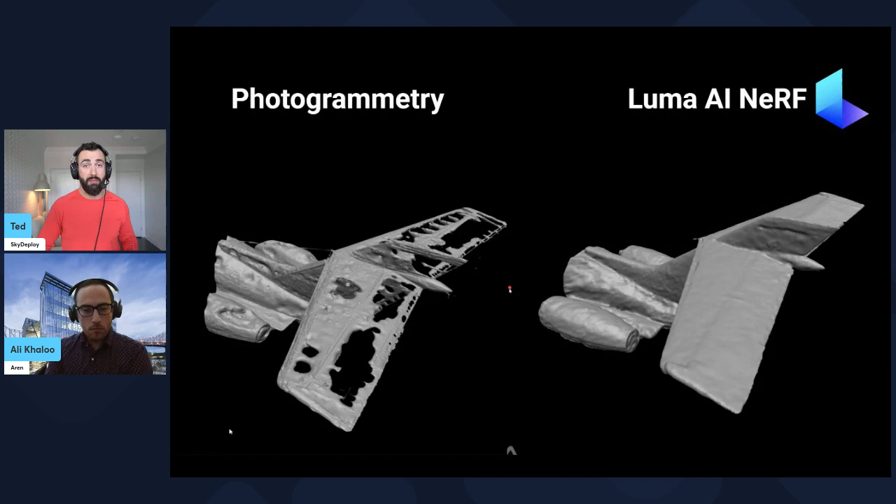But you can see right away that the holes, the Swiss cheese on that tail section, has been patched up, and it looks pretty geometrically correct, right? So this is a huge advancement. We have a lot of problems in reconstructing shiny or very flat materials in terms of their surface texture. So I think this is really important, especially in the field of inspections for civil engineering, because we're running across metal surfaces all the time. That's 3D reconstruction. So we have some work to do there, but we're on our way.

With data collection, that's one of the biggest factors in really moving this forward, I think, because you have to really understand there's two different methods of collecting data: fully manual, but then there's automatic, of course, which is what we've had up until now. But automatic is still difficult. You can automate, but it's still dependent on many factors. It takes a lot of planning, a lot of skill in the field and before to do that planning and make sure that everything is safe. In a lot of cases, you're dependent on other factors like GPS, which is completely out of your control.

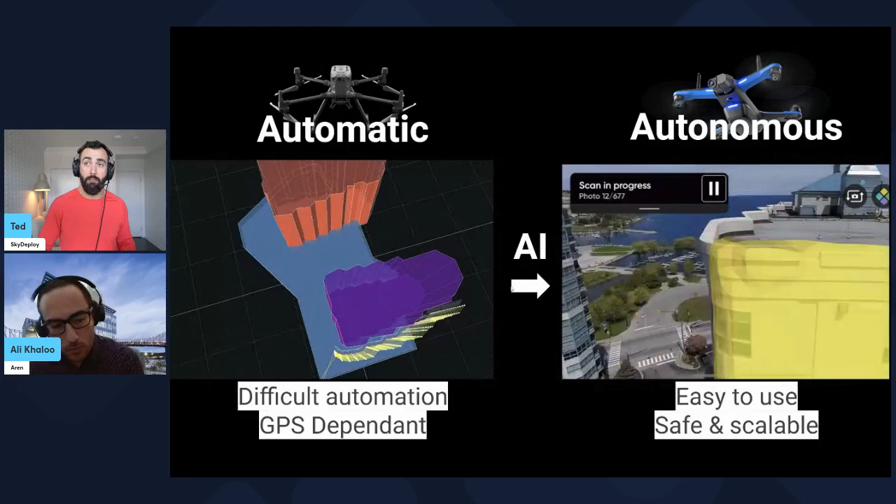And I'm personally seeing a huge move forward in this field and making this more scalable, easy to use, using drones in areas where you would never have put a drone before, like under a bridge. And this has me really excited because this means it's scalable. And as a business owner, I always think about scale. I always think about how are we going to be able to grow and do everything everywhere all at once. Movie reference there.

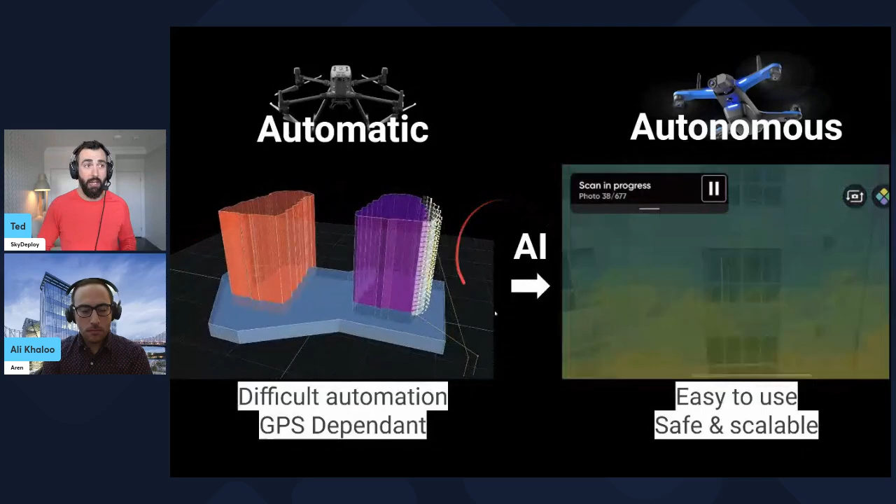And this is my favorite component of the data collection part, the AI in the flying of the aircraft. Specifically, the example you're seeing here is the Skydio 2 Plus with 3D Scan that I used for this facade inspection, and I planned it with an automatic drone in mind first. Then I tried 3D Scan when I got there, and it just worked, and it was so easy, and I could hand it to any one of my employees, and then they're off and running.

And then finally, data analysis. That's what we're going to be talking about in depth today. And data analysis, I mean, this has been around forever. We're always analyzing some sort of data. But in the civil engineering world, it gets pretty complex. And even with drones, that complexity remains, right?

So Ali, you shared with me the slides on the left. Can you walk me through what we're looking at? Absolutely. So before jumping all in on AI and analyzing visual data, let's take a step back and understand what is the status quo. And as I mentioned before, I've done it myself, so I have first-hand experience on this one.

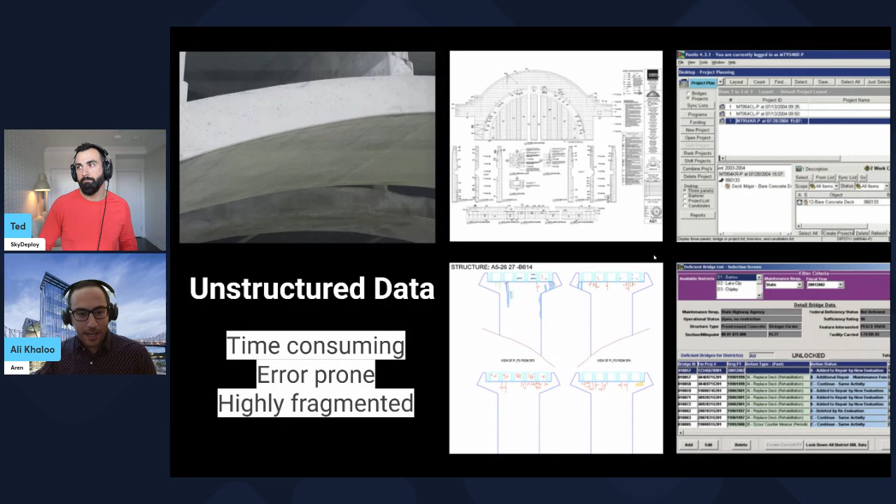So when you're looking at the way that you're creating data from our assets, the whole condition assessment inspection, which later on you're going to use for decision making, that whole pipeline is very much precarious and outdated. And when you're looking at the details of it, it really didn't change much since the 70s. So what happens right now is you have very skilled engineers that you have to send out there, and they have to literally climb and walk miles and miles of infrastructure, let's say bridges, and with nothing better than their naked eyes, they have to look for millimetric damages, such as cracks.

Sometimes it's literally naked eyes. Sometimes it's hammer sounding that they have to do to find the hollow area. Sometimes they have to use binoculars to look for different things. And after doing all of that, which by its nature is going to be inconsistent and subjective, you have a newbie going out or a very experienced inspector, you're going to get different results. And that's known within the industry. After that, you're coming back to your office and you have to put together a report.

So in the middle, what you're seeing are actual reports from a building facade on the top and from a bridge on the bottom. In these cases, you have to go through your field notes, go through the images, which like the ones you're seeing here, by nature are decontextualized. So you don't know exactly where you took those images unless you're making clear notes. And now you have to put together those reports. In a good number of cases, you have to go in AutoCAD and start drawing that facade, that element of the bridge, and draw the damages, like the one you're seeing in the middle on the bottom. Those red lines are cracks drawn by an engineer manually on that asset. So it's a very tedious task.

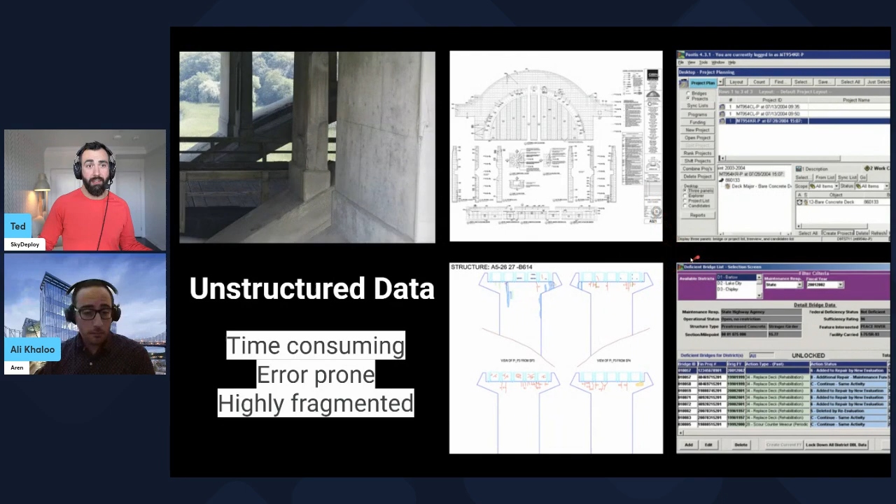Absolutely. So you're in the thick of it. You were the one doing some of this work and making these spreadsheets and these drawings. And I guess that's where the inception, the idea for AREN came from, right? And that's the problem you wanted to solve. So that's what AREN is about.

It's about ingesting various types of data and then using AI, computer vision, a whole mixture of technologies to really streamline that final process and then essentially make better decisions, because everything is in one place, but it's also been really boiled down to what matters and efficient. Absolutely. So you have to keep in mind that we are capturing a lot of data from these assets and different sources.

Sometimes it's something as simple as photos from a point and shoot camera or your cell phone. Maybe you get more sophisticated and you add a drone to the whole data collection. Maybe you have lidar. Maybe you have a 360-degree camera. Maybe you have infrared. So what our product does is it takes that data from our clients, runs its magic, and then as an output, what you get is a highly detailed visualization of the asset and its health through time, as well as preventive maintenance plans and capital allocation plans.

But when we're talking about the 3D models and the way that we are doing this change in time analysis, it's based on the information that you're seeing on the right hand side. So basically, we are creating 3D models, so all the analysis happens in 3D. We are detecting all the damages, quantifying those damages, providing the severity analysis of them, and all of it is based on the codes that we have in each country. Let's say in the US, for bridges, you do that based on the AASHTO element level bridge inspection manual. So everything is according to the standards, and it's basically part of the workflow of how we do the inspections, but now it's augmented through technology and through AI in particular.

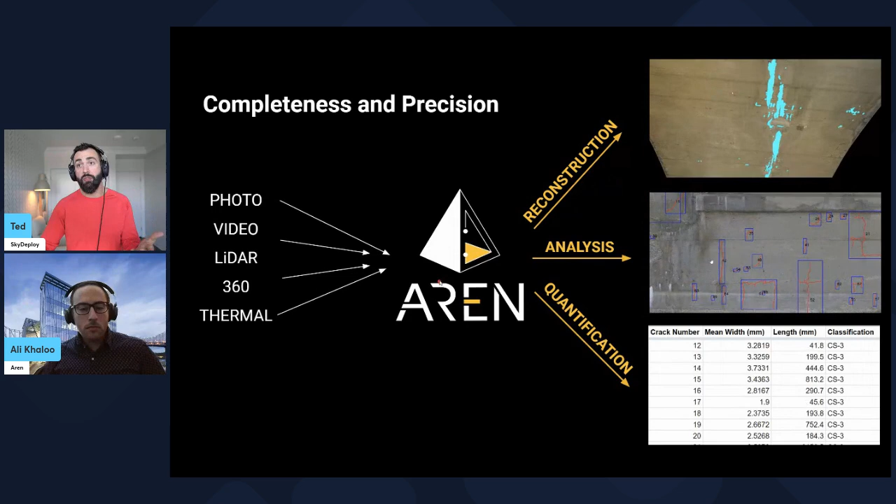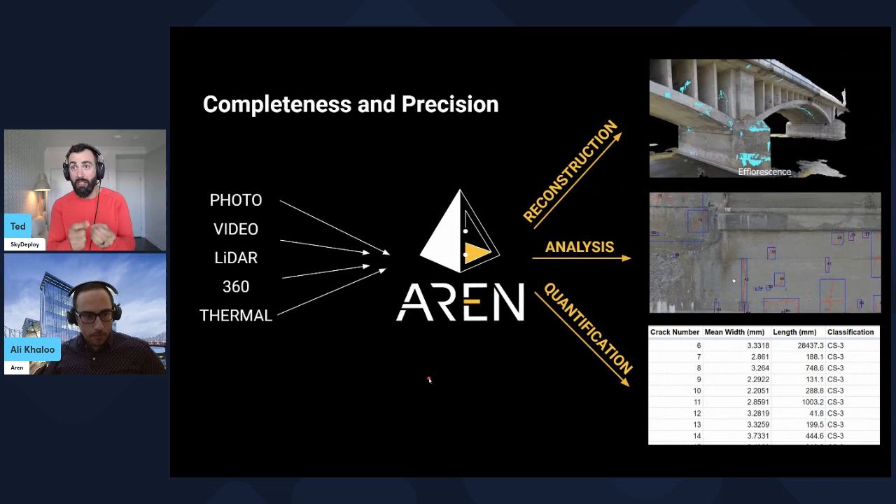But when those things come together, and as they are getting easier and more scalable to put together, then you get the 3D reconstruction, the 3D model from photogrammetry, built into your product. You don't have to do that elsewhere and bring it in. You get the analysis through the AI, so that saves an insane amount of time in terms of going through and looking for it. Right, that's 90% of the work, and then an engineer can validate it afterwards. And my favorite part is the quantifiable data on a damage by damage, element by element level, and that's something that before I saw AREN, I hadn't seen done completely in an automated fashion. And that got me really excited.

So, short answer, absolutely yes. And you have to keep in mind the whole goal of asset management. Let's say you're an owner and you're going to have that asset for the next 50 or 100 years. These assets usually outlive us. What you want is to minimize the life cycle cost and at the same time improve the serviceability of that asset. Those are the top two things that you want to do. And in order to do that, as we mentioned a little bit earlier, you need to have good data. You need to have robust data and assessment.

So what's happening here is, as you do these kind of assessments over time, which by law you have to do at a certain frequency, you have to go back to your asset and do it. Now, because you have this detailed information, we are able to do this assessment over and over time and do this change analysis.

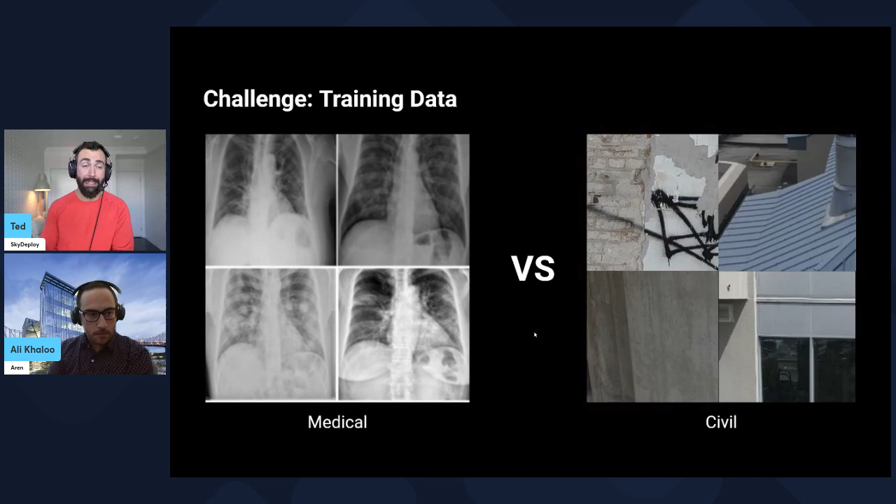And like you said, the data isn't collected with the intention of making it into 3D geospatial formats after, right? So no photogrammetry intended with the data collection, even if the data set exists. So that's a big problem. Now, let's say you have a data set, you've trained it. What kind of scene understanding is there, and what do you need to apply in the case of engineering and civil assets? That's a very important thing. It's not just, hey, let's apply AI. Let's apply AI to this very particular problem.

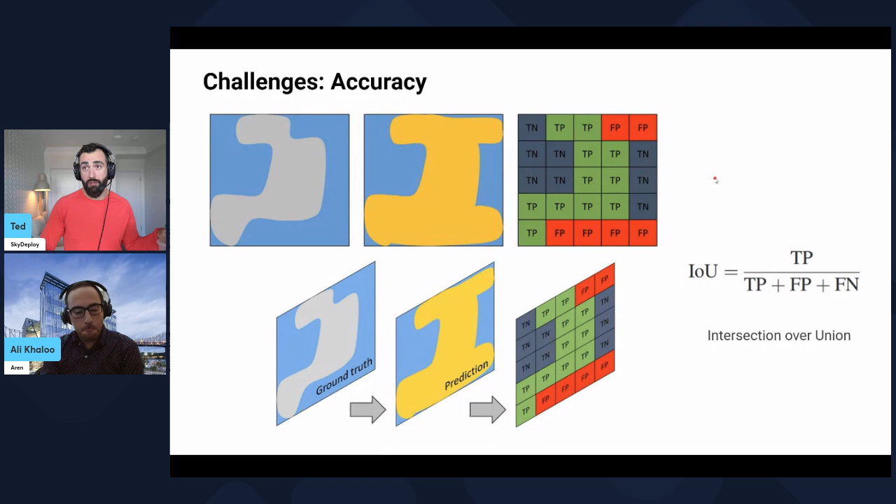And it's a real reputation burner if you get it wrong, right? Yep. You've got to be ready for game time when you're going out and doing this type of inspection, and it's something that the engineers are looking at. So there's no chance for mistakes. You really have to prepare and be ready and have great accuracy out of your models.

So another little factor of difficulty, just really quickly: the way I understand this slide is the crack in this image takes up such a small percentage of the pixels, right? It's just such a minute detail. To us humans it's obvious, but to a computer that only sees numbers and pixels, that can really throw it off as well, right? Is that what we're looking at here?

Absolutely. So you're talking about challenges on why this is a tough cookie, a tough task. So basically what happens here is the computer is going to learn from the different features that it's going to see in your data. So you have the target region, let's say in this case cracks, that yellow, as a good example.

So when you have the pixels associated with the crack, or defined as cracks, and the ratio is 1 over 1,000, so one for the crack pixel and 1,000 for everything else, we call that an imbalanced data set, and your mathematical model, your deep learning neural network, whatever you want to call it, should account for that, because you're not seeing so many of the crack pixels. You're actually seeing a lot of background.

So what's going to happen if you don't account for that? Going back to the previous slide, which is the accuracy, if you don't account for this kind of imbalanced nature of your data set, what you're going to have is what you're seeing on the lower half of the slide: false positives and false negatives. Especially the false positives, there's going to be a lot of that.

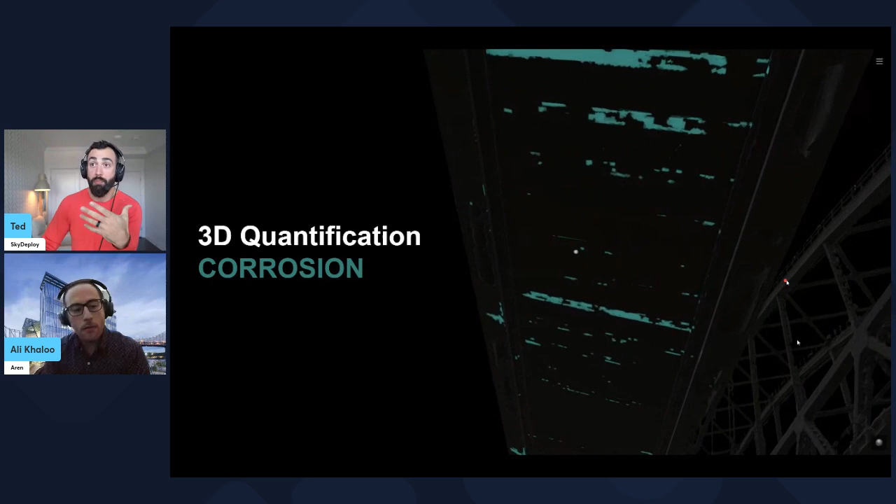Here's an example that I collected. I collected this with the Skydio 2. It's by far the best drone to collect bridge data from, in my opinion. And I never collected it with this use case in mind, right? We were doing a video inspection, which is typically how we've done bridge inspections. We had some extra time because we were done so fast, and we collected this data so I could test out some photogrammetry because I love photogrammetry.

But one of the things that you detected right off the bat, it's concrete. So you checked for efflorescence, cracks, and spalls. And I was really impressed. And anyone that sees this immediately understands what they're looking at, and they immediately understand where they're looking at, right? There's no ambiguity there.

It is contextualized, right? So that allows engineers and experts to really identify issues from a very high level, but also very specific as well, element to element. Something that may be not so important if it's isolated, but if there are other things around it going wrong, then that's a big red flag, and you need to have the expert look at it. And just to emphasize why it's important that you have these labeled 3D models.

So number one is, I've had many conversations with engineers that have seen drones, they have seen 3D models, but basically the impression was, it's cool, it's nice, it's a nice 3D representation of my asset. Yes, of course I can do some virtual inspection type of work on it. I can take some dimensions. That's all good, that's all benefit.

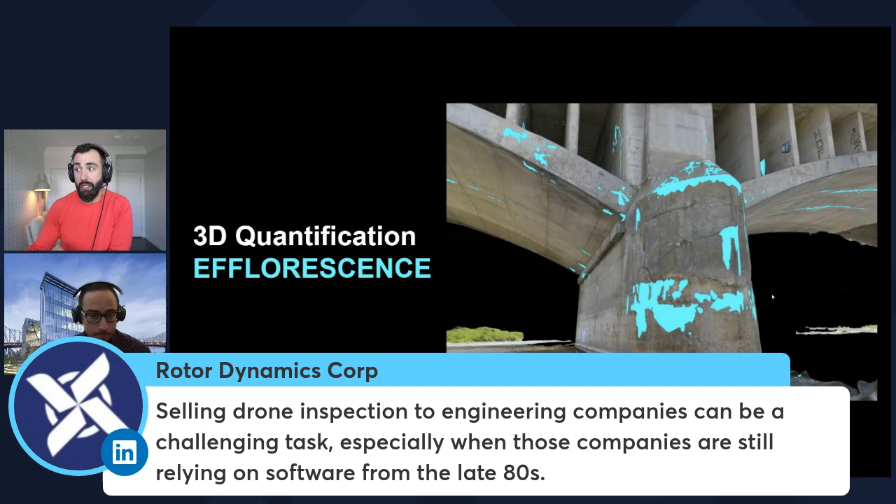That's why we are doing all the modeling in house, and then even through our platform, we can very easily render these models on different devices with different compute powers. Right. And that brings us to the second point that I wanted to make. That is the quantification. By having everything in 3D, now you can even quantify in 3D and understand, again, the size of different damages, the depth of the spallings, and all that kind of stuff.

And as you mentioned, we do all of that per material. So right now, in terms of offering to our clients, we are working with clients on concrete assets, on steel, asphalt, masonry, stone, limestone, for example, and terracotta. And it's important to mention why we did it this way, why we did material based, because now we have this huge catalog of AI models for concrete, and now we can apply that to a bridge like the one that we're seeing on the screen.

Or we can apply the same model to cooling towers, to industrial chimneys, to dams, to levees, you name it. Same thing with steel, same thing with asphalt. So it just helps us to get to different verticals without customizing the technology, or tweaking different pieces of the technology.

And so we had a question here. Is the solution already marketed in France or Europe? I haven't seen it yet. Well, it doesn't matter where you are, because as long as you're giving it good data, then it works. So it's completely agnostic of the input source and how you collected that, as long as you did a good job. And at the end of the day, we're a SaaS product. So if you have the data coming from Paris, or coming from San Francisco, it doesn't matter to us, as long as it's good data.

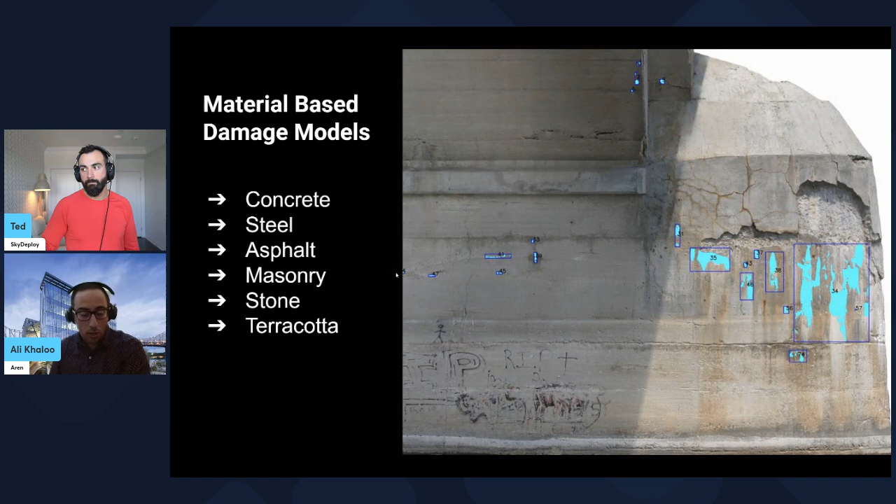And regarding, are we working in Europe? Yes, we're working in US, in Canada, in Europe, in different countries, all the way to Japan. So we are available to get different jobs in different parts of the world. And you're seeing all kinds of data.

So one type of data that I've recently had a chance to run through AREN, and I'll take you guys through a little case study of first how we did the data collection, because that's, in my opinion, where it all starts. And at the end of this, I'll also share a link that Ali provided, and you guys can open the data set yourself. You can explore in 3D. And this just shows you don't need a fancy computer to open this. This is a 2 kilometer runway, very high resolution. You can open it on your phone with a QR code. So check out this airport.

We have an intersecting runway, and we're doing an asphalt condition assessment. And the interesting thing was that drones at airports are complicated. Everybody knows that, but it's doable. And we were really out there to discover how complicated is it? Is it scalable? And what are the things that people should look out for? This was done through an academic institution, and we had a small opportunity of time where they were repaving the intersection right here. This runway was completely repaved at that point, but they left the intersection for last.

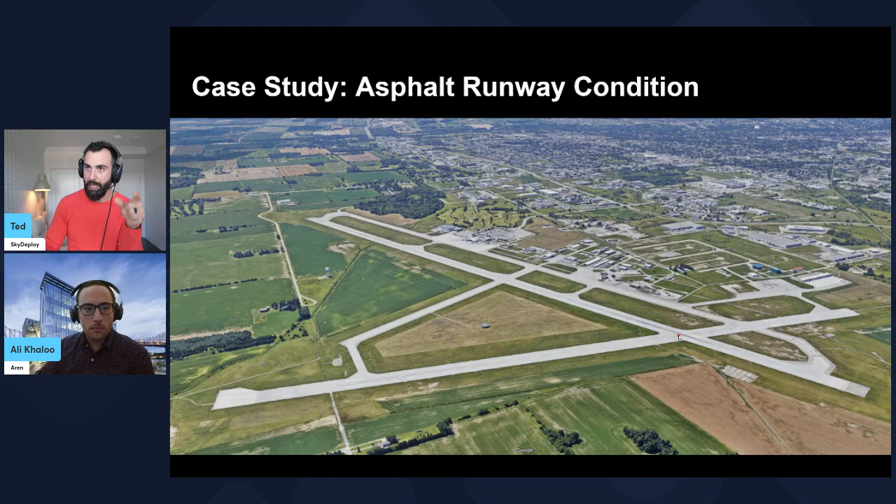So the airport was open. There were aircraft, jets, 737s going in and out throughout the day. It was a towered airport, it's an international airport. We have flights to all over North America from here, and we had to keep all of that in mind. We couldn't shut down the airport for this, because there wouldn't be any point. We could just do it the traditional way, which is literally just driving down the runway and looking out the windshield. Call that a windshield survey.

And that type of survey is completely unquantified, right? Just random samples. The engineer, or in most cases, the airport operations people, are just kind of giving themselves a qualitative look at the site, and they're sampling different sections. So our thesis was, let's see how quickly we can do this. Speed is super important, and we can't shut down the airport. Of course, we're going to have to shut down that surface. That runway is not going to be taking takeoffs and landings, but you have to do that anyways.

You have to do that if you're driving on it with a car, or if you're walking on it. Any human is on that airport surface. It has to be NOTAMed and closed, at almost any international airport, larger airport with a tower.

So a few of the things that we encountered that were interesting: we were at an intersecting runway, so we had planes that were landing and taking off right above us. So we had to change the altitude in some areas. In this intersecting area, we had to fly lower to the ground, and then we kept the same altitude in the other sections.

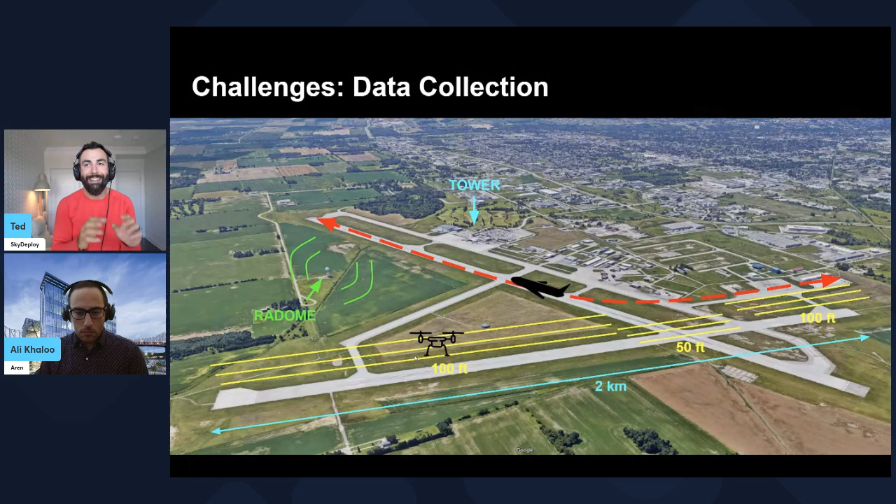And when we were flying, we noticed that the signal strength between the drone and us was degraded quite a bit. So this is for people that are thinking about doing this, maybe exploring it. Keep in mind all of these things that we learned, and hopefully you're prepared for them too.

So we had a bit of a balancing act to do. We needed high resolution, high accuracy data, but we had a large area and little time to do it. We estimated that the data collection needed to be wrapped up within about 2 hours, end to end, because we didn't want conditions to change. Weather is highly variable, and then also the traffic. We didn't want to disturb any of the airport traffic or cause any more problems, because they're never going to let us do this again.

So high resolution means low GSD. We were using a 45 megapixel camera, a P1 on an M300. So that's very accessible. That's a workhorse in the industry. It's not super expensive. It's affordable. You can get it. Most people that do operations already have it. 45 megapixels is not that many.

We had to fly low to support this mission. So that means low GSD, low ground sampling distance. We were able to achieve a ground sampling distance of about 0.3 millimeters. And it turns out that the tower, after we did this flight, actually preferred us to fly low. When we were flying at 100 feet, that was low for us. But they said, could you go lower next time?

We could, and the reason for that was that when we were at 100 feet, they could see us, and this drone was moving back and forth, and it was kind of confusing. It was something that they didn't want to have in their sight and think about because they're so busy. So that was the first thing that we learned. Low is good, so that's promising.

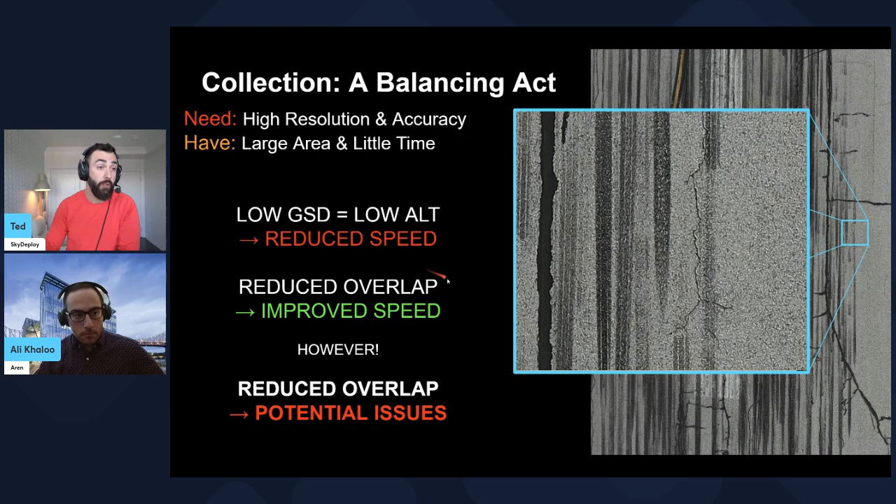But when we went back and processed it, and this was actually before I had even met you, I tried processing this on a few different photogrammetry engines, which everybody knows I love to do. And I had some interesting problems. I had GCPs, I had 36 of them. We set them up as you're supposed to set them up when you're doing corridor mapping.

We had PPK. We fixed the metadata in the image with PPK tags, so the position of the drone when it was taking that picture was very accurate. And all of this together in any other situation would have meant that it's going to be just a perfect, highly accurate map first time you try it. Well, this is what I got first time I tried it.

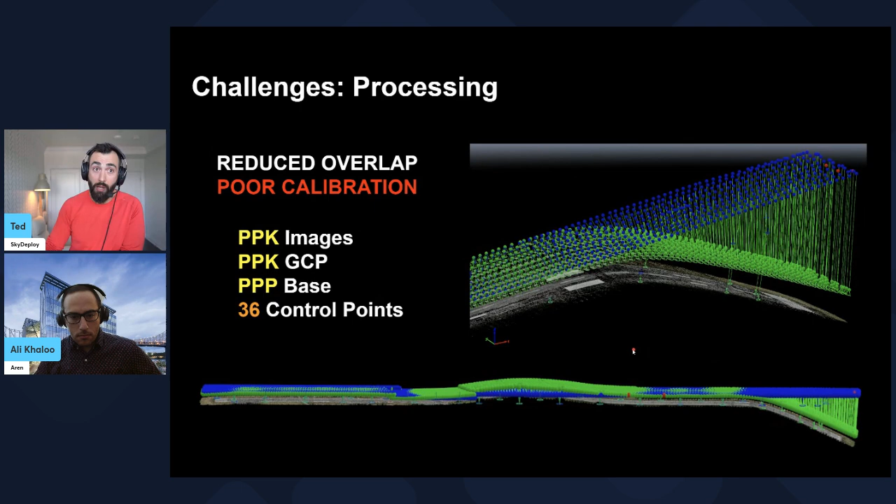For people that are familiar with photogrammetry, this is in Pix4D Mapper, which is one of my absolute favorite applications. I love it, but it didn't do so well with this. And I discovered after a lot of tinkering around that this was related to the camera calibration. Because we had overlap that was less than typical, and we were flying close to the ground, and the runway had a lot of features, but the features were very similar because it's asphalt here, asphalt there, the internal camera calibration did not optimize those values as it should.

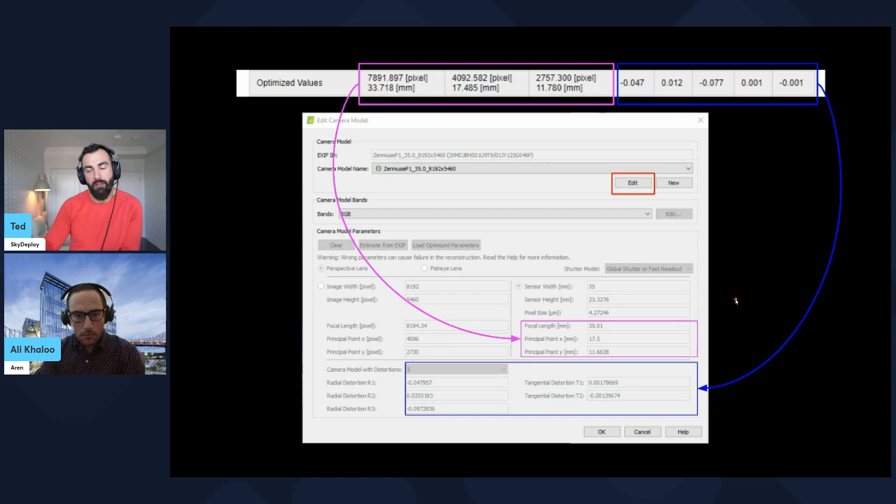So I eventually fixed this problem. I got to the bottom of it. I made a post on LinkedIn about it as well, and I'll probably do a little bit more. But it was time consuming. Processing took a long time, about 24 hours, and I'm doing it on a fairly beefy computer. And I got my resolution. I was able to figure out exactly what that resolution is because of those ground controls. And overall, the model was within 1.5 centimeters in RMSE error. So the accuracy, even across the Z axis, the up and down, was within that 1.5 range.

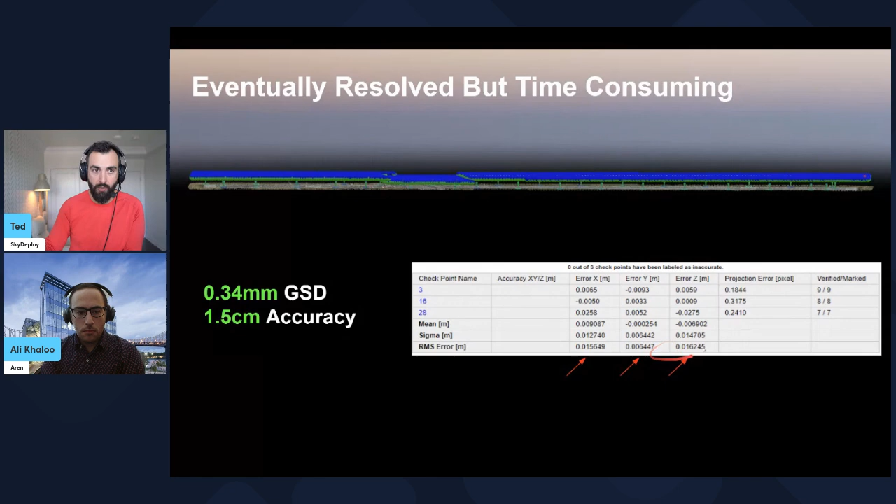That brings up the question. I did GCPs, I did PPK. Did it matter? I ran this test 2 times, once with just PPK images and once with GCPs and PPK tagged images. And I found that when I processed it through AREN, the difference in length between control point A and control point B that were the farthest away from each other horizontally was just 0.019%. That was 0.35 meters or 35 centimeters across almost 2 kilometers of distance.

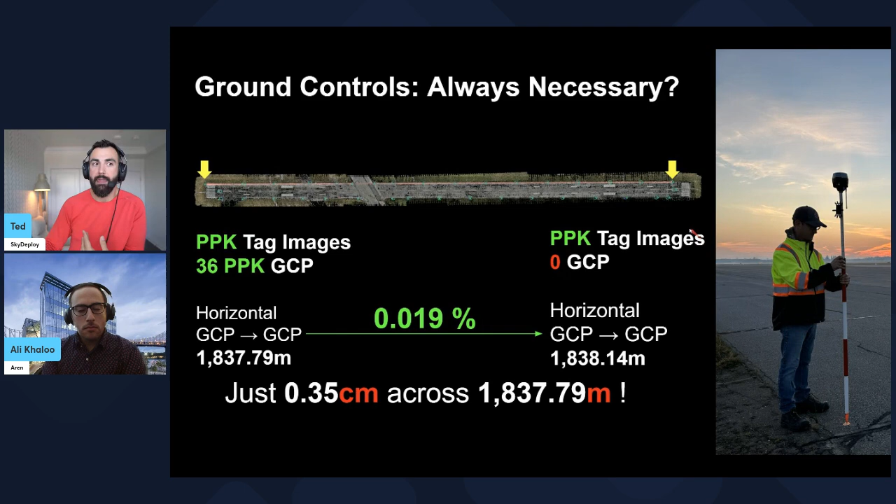That blew me away. Doing control points in this kind of situation basically doubles or triples your time. We had to get out there at like 5 a.m. and start collecting these images. And turns out you don't need to do that. So this is very efficient, very practical, and I think airports should be doing this. The amount of data that we collected was incredible.

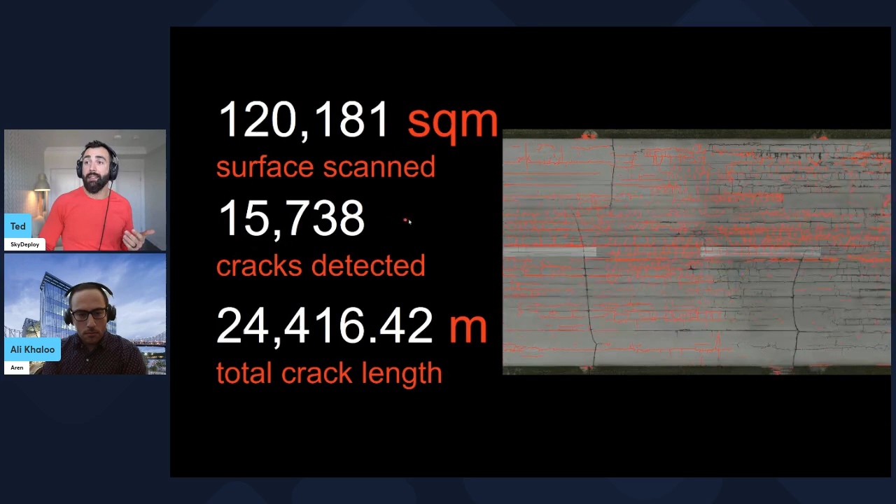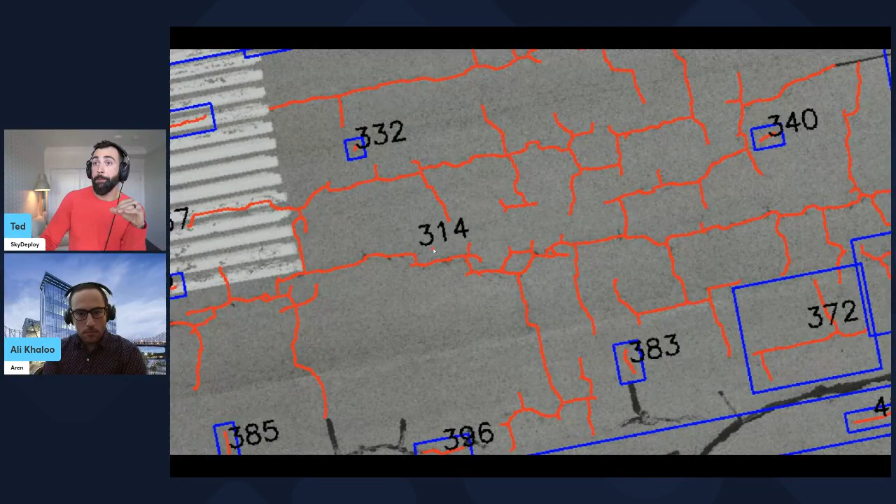Shout out to the other photogrammetry engines that also had no issues, but they didn't have anything for the analysis. I can't go and label 24 kilometers worth of cracks. And when we ran it through AREN, we had almost 16,000 cracks detected. And if you stretch those cracks end to end, every little branch, every little corner, it adds up to about 24 kilometers of cracks. And if you look at it, very, very few false positives. I was barely able to find even one across the entire data set, and very few false negatives given the data that I was able to provide it.

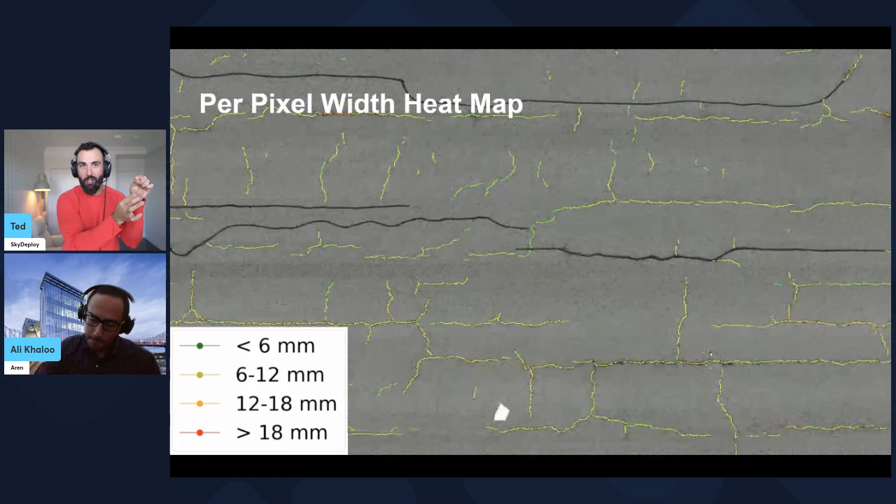It's exactly, and the equivalent in the real world, or the current standards, I guess, if there's no standards for this because it's so in depth. But what you would have to do to replicate this would be basically to get out your crack gauge or a ruler and measure the width, to show that to the audience, that is the crack issue we're talking about, and measure it every 3 millimeters down the crack for 24 kilometers worth of cracks. No, that's never going to happen, right?

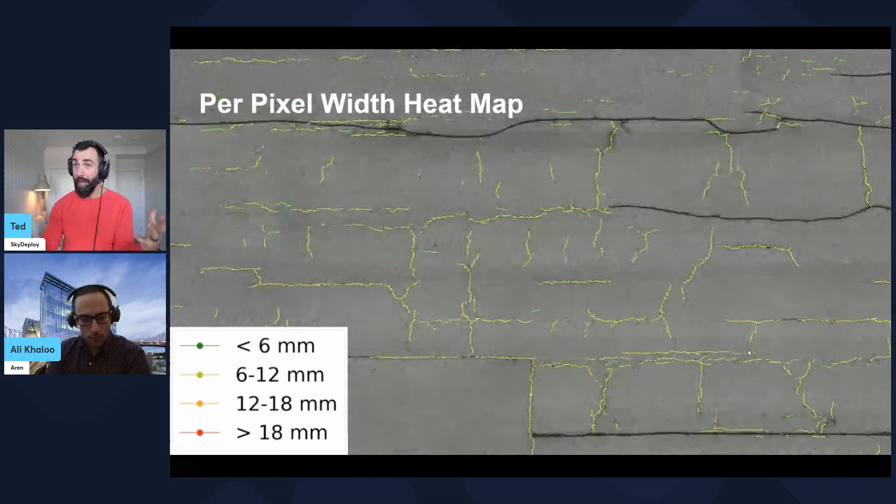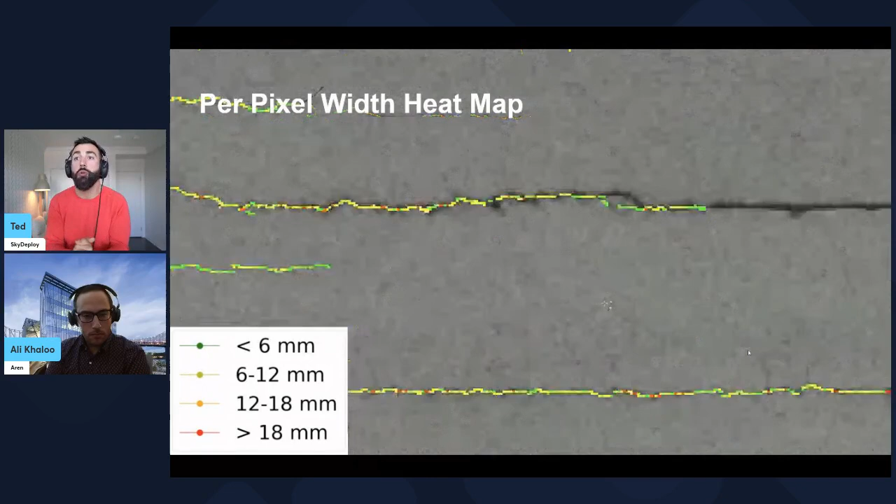So, if anything, this is orders of magnitude more data than we're used to, but it's data that matters because, as any engineer will tell you, it's the crack width that they care about, not so much the crack length. And seeing the relationship between the crack length, the crack pattern, longitudinal, transverse, alligator cracking, just how they're arranged, gives you a lot of insight about what the potential issue would be underneath the ground, right? So then you can maybe go and ground truth it. You can go and do a GPR, a ground penetrating radar. You have a starting point because you have all of the contextual information and all the quantity information together.

If you pull out your camera app and look at it with the camera, you don't even have to take a picture. You can open up the link and you can take a look at the model itself. So dive into that. And if anybody has any questions, I'll go through some of the comments that were made, and then Ali, you can answer them.

All right. So I think we've answered this one before. Does AREN host the models, and does the annotation give a severity scale? Yes, yes, and yes. It's all proprietary models that we've generated in order to serve our clients, and yes, we're hosting everything there. Perfect. Next question: is it possible to use a national classification system? Germany has different systems for damages than the U.S.

Absolutely. So the way that I always look at this is the most difficult part is the quantification, which is now you have all the information. How you are putting the severity class and assigning that to each of them, it's correct, it can be different in different countries, and that's, let's say, the easier side of things.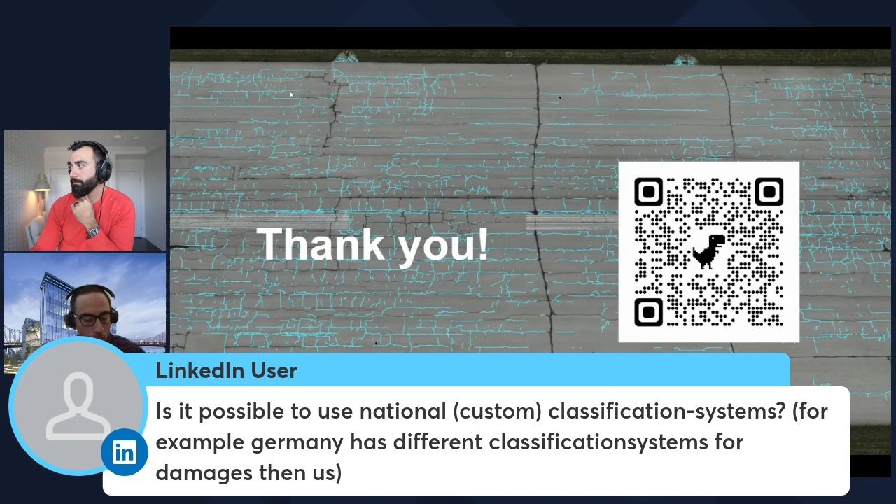Because we're working in different countries, we are very much used to this, so we can easily adopt whatever standard you have in that particular country, or even for that particular asset. Sometimes the asset owner wants even more granular information than what the standards of the country tell them to do. It's just pixels on a screen, right?

And that leads to the next question: can we rely on ortho photos? Some of the files that you delivered to me, you included ortho photos in that, right? So an ortho photo is a 3D model basically flattened from a perspective. So you can do both, right? Is there anything that I'm missing there? No, you can do both. In fact, when you're looking at the deliverables, we provide both of them.

In the case of a flat surface like this one, it's going to be just one orthomosaic covering the 2 kilometers. For bridges, it's each face of the elements you're providing that orthomosaic, and we're reporting based on that one. The reason we do that is it's just an easy copy paste into whatever PDF format the engineers have to report to the owner. So we are providing all of that information to them.

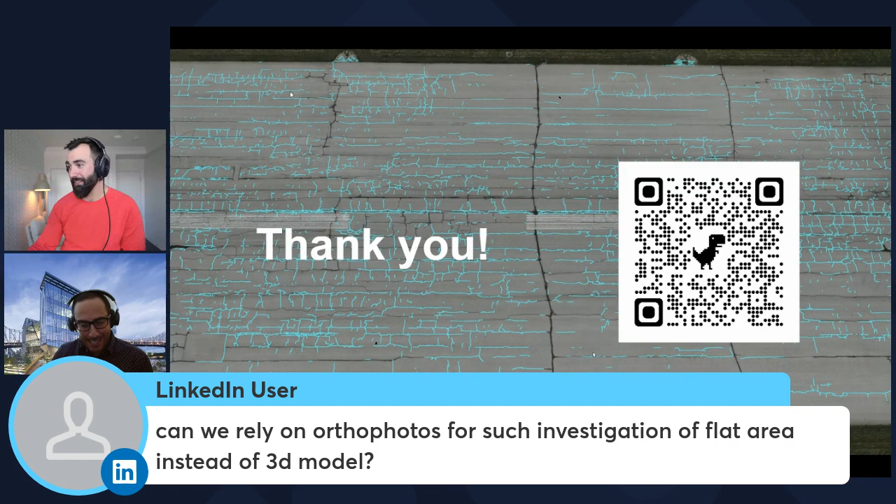Yeah, and PDF is still king, right? I always tell people in the 3D world that we're competing with 3D data versus PDFs at the end of the day. Little by little that will change.

Next question: is it possible to detect crack depth? I can answer that right off the bat. I tried doing this. If the crack is wide enough and the width of the crack is wider than the pixels, and in some cases even just slightly, you can. It's GIS data, right? You pull it into something like QGIS, use the profile tool and draw a line across it, and you'll see the profile. I was actually able to match visual cracks in the ortho to a significant dip in the Z height in the profile view. So it really just depends on your data.

If crack depth is super important to you, then make sure you get data with the resolution that allows you to do that. Am I wrong there? Have you seen this from your clients? We are giving the same exact answer. If that's what you're going for, you have to pick the right camera at the right distance with the right focal length to get to a GSD number that provides that depth for you. That's the only way to do it.

And with all of this, you have to remember, it's intuitive, but if you're looking at a 0.05 millimeter crack in this particular case, you cannot expect to achieve that with a GoPro camera standing 100 meters away. So you have to do better than that.

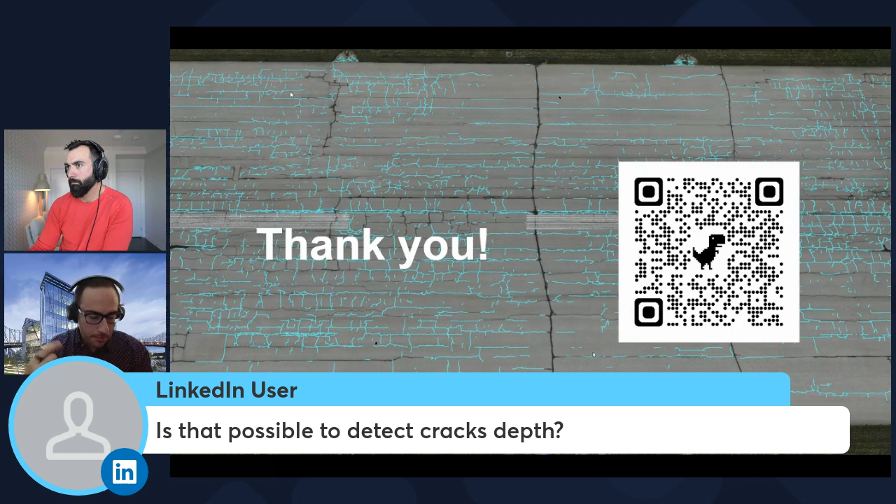But yes, if the GSD complies with what you're looking for, and the depth is wide enough to see, then we can actually detect it and quantify that.

Perfect. Next question. Sorry, the names aren't coming up, everybody.

Hello, thanks for the explanation. Are the projects based on photogrammetry or combined with LiDAR point cloud capture? I've done combined merged data sets where we go and get LiDAR and we use that for the surface, for the mesh, and then throw the photogrammetry in there as well. And we get the best of both worlds. We get the accuracy and resistance to those materials that LiDAR provides, and we get the visual information from the pictures. So I've done that in a few different software applications that run on your desktop, like RealityCapture.

But can AREN also support that if you are uploading that into the AREN pipeline? Yes, absolutely. We have done that on several projects. For example, inside of the box girders, they had a laser scanner and they had images capturing the walls, and that's how we actually put together a fully detailed 3D model of the box girder. Just an example. But the short answer is yes. We are able to do that.

Excellent. Benjamin says a runway is bathed in ambient light. He's absolutely right. What constraints act on capturing useful data for poorly lit surfaces, dark underbelly of bridges, dynamic range issues, shooting into the sun? Oh boy, I could talk for a day straight on this topic. You have to collect the data as it is, right? So the camera matters, the exposure settings matter, the file type matters. JPEG versus RAW. I'll talk your ear off about why RAW is so important for me.

If you can see it in the picture and you can extract it from those pixels because the sensor was able to trap it, then you can get it into a pipeline like AREN and do these detections. And as we talked about with the data augmentations, that's one of the most important parts you have to get right. Those augmentations are there so that a variety of imagery will work, even dimly lit in some cases. If there's enough information at the pixel level, it will work. So again, it always comes down to the data collection and the field work. It's a bit of an art and a science, but if you can do it, you can get results. And that's getting easier thanks to better cameras, better drones, and everything like that.

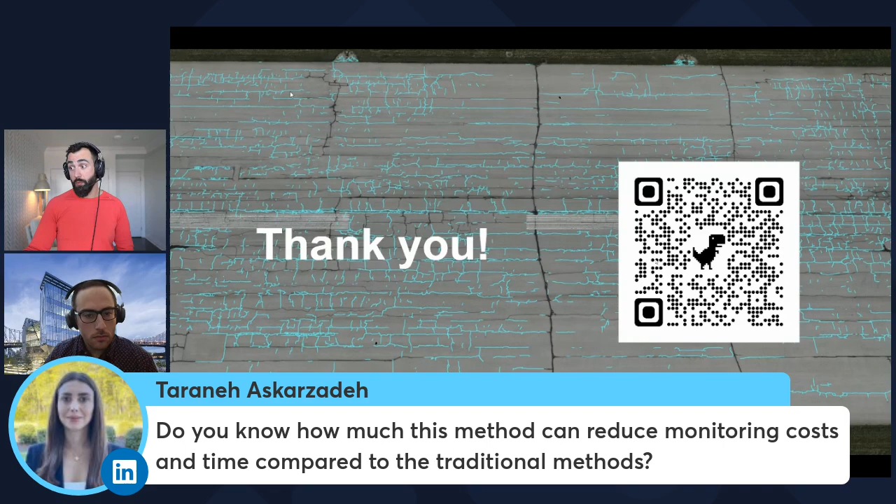So it's worth it every time because you can plan for that. And with previous methods, you can't really plan. It's a lot of intuition. It's a lot of sampling. There's a lot of luck involved. Of course, you can do more and more of it, but pretty soon you're going to be spending more money doing it the traditional method than you're going to be doing it once with this and then repeating it occasionally.

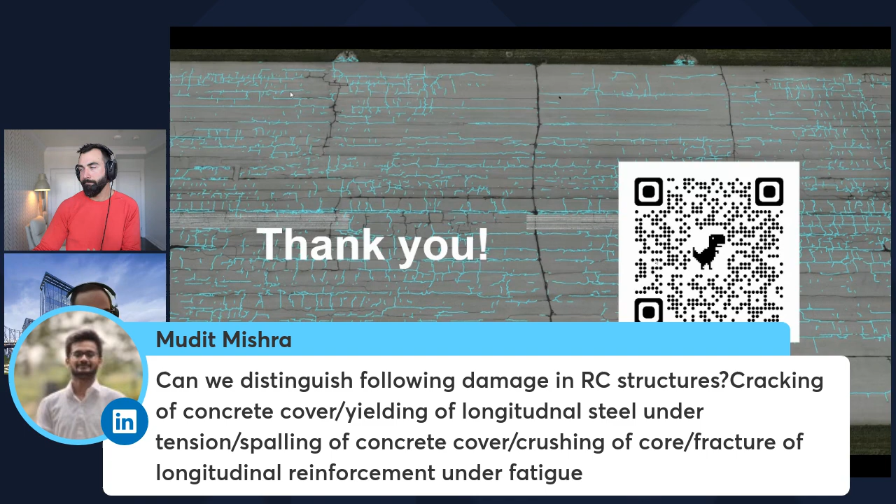That is absolutely right. And on top of that, that's the part I always like to emphasize. We're augmenting the process. So you have the human in the loop, and that is our client, the civil engineer. We give all of this data to them, and then they start to see, okay, now you have this kind of cracking here and that kind of cracking there, these are the sizes of them, and maybe what goes wrong there, and maybe they have to go out again and do another test, some NDE methods.

This is all about making sure that the engineers have the right data to make decisions. So it's not about, oh, we're going to replace the engineers with a machine. None of that is going to happen. It's all about helping them do the job easier, faster and more thorough.

Yeah, that's it. And engineers have a lot of work ahead of them. They've always had that. It's a tough job. It's hard to become an engineer. They have better things to do. They shouldn't be poring over PDFs and drawing lines where the cracks are. So let's free them up. Let's give them some tools, and let's get our infrastructure and our assets in a better state for the long term through that.